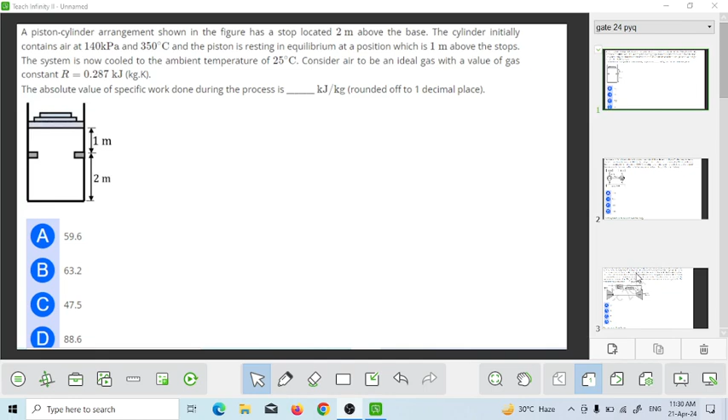In the previous class, we discussed GATE 2024 1 mark questions. A few questions were solved, and in this class, we solve the rest of the questions from GATE 2024. So, the first question is a piston cylinder arrangement.

The piston cylinder arrangement shown in the figure has a stop located 2 meter above the base. This is the base. Here, the stop is located 2 meter above the base, and the cylinder initially contains air at 140 kilopascal pressure and 350 degree centigrade temperature. The piston is resting in equilibrium at a position which is 1 meter above the stop. This is where the piston initially rests, and the system is now cooled to ambient temperature 25 degree centigrade.

Consider air to be an ideal gas. This is the process. Consider air to be an ideal gas with value of gas constant R equal to 0.287 kilojoule per kg Kelvin, and the absolute value of specific work done during the process in kilojoule per kg is equal to how much? Kilojoule per kg, that means we have to treat mass equal to 1 kg. So the given data will be: this is position 1, this is position 2, and this is position 3.

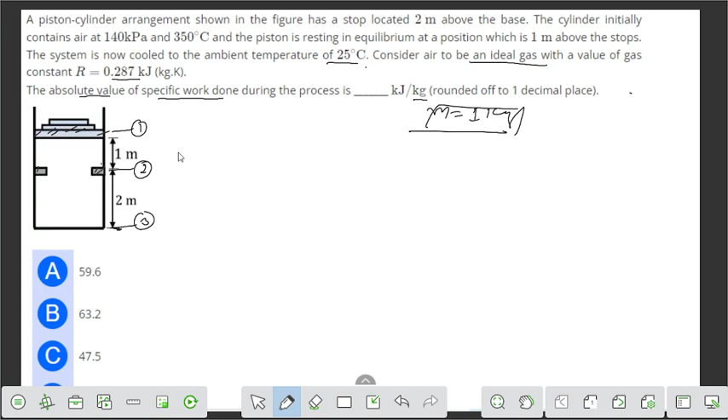As from position 2 to 3 the volume does not change, and this is a closed system, work done from 2 to 3 will be P(V2 minus V3). As the position does not change, V2 and V3 are constant, that means work done from 2 to 3 equals 0. So we have to calculate the work done from 1 to 2. Work done in process 1 to 2 will be P(V1 minus V2),

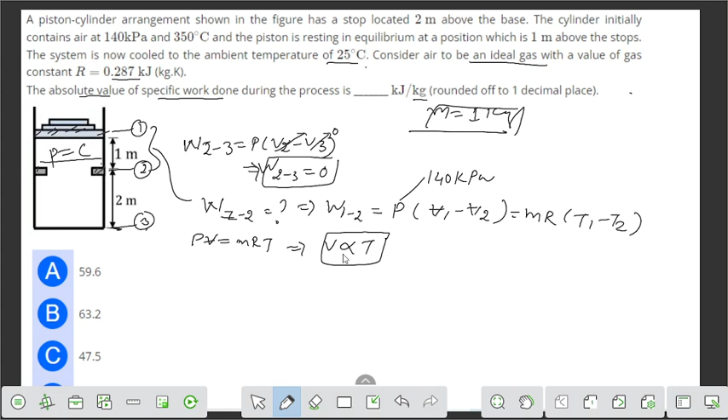where from 1 to 2 pressure is constant. The given pressure is 140 kilopascal, and V1, V2 we have to calculate from the ideal gas equation, PV equals mRT. As pressure is constant, volume is directly proportional to temperature, so you can write it as W equals mR(T1 minus T2). The temperature T1 given is 350 centigrade, converting it, 350 plus 273 equals 623 Kelvin. T2 we have to know, mass is 1 kg, and R given is 0.287 kilojoule per kg Kelvin, but T2 we have to calculate.

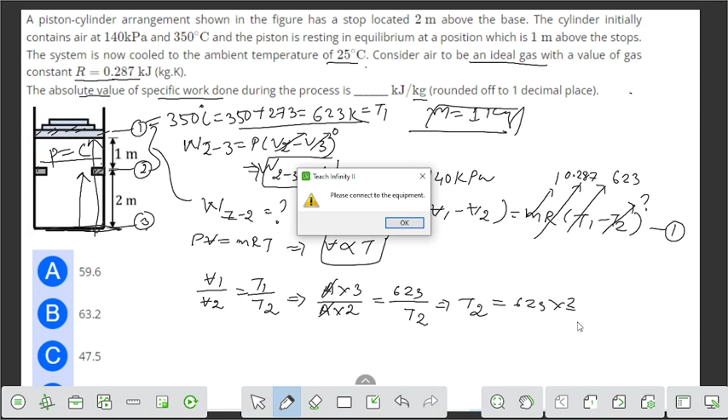This is equation 1. As you know, V1 by V2 is equal to T1 by T2. V1 is equal to area into this length, that means 3 meter, and V2 is equal to area into this length, 2 meter, which is equal to T1, given 623 Kelvin, over T2 which we have to find. So T2 is equal to 623 into 2 by 3, T2 equals 415.3 Kelvin.

By putting the value of T2 in equation 1, we get W for process 1 to 2 equal to 1 into 0.287 into (623 minus 415.3), and we get 59.6 kilojoule per kg. So option A will be the correct answer.

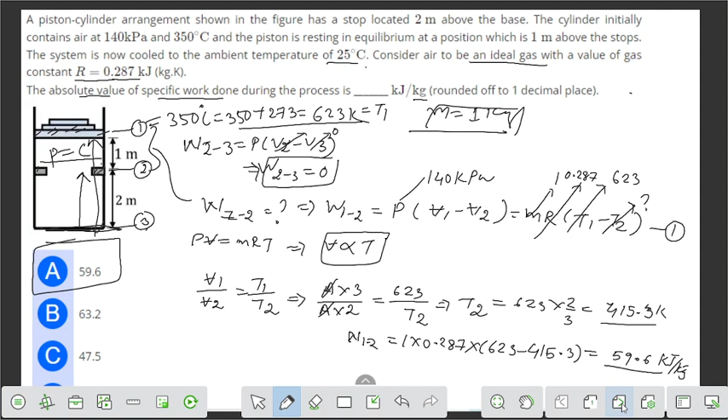Then the next question is: a heat pump is driven by the work output of a heat engine, as shown in the figure. The heat engine extracts 150 kilojoule of heat from a source at 1000 Kelvin. The heat pump absorbs heat from ambient at 280 Kelvin and delivers heat to the room, which is maintained at 300 Kelvin. Consider the combined system to be ideal; what is the total amount of heat delivered to the room together by the heat engine and heat pump in kilojoule?

So this is the heat engine diagram and this is the heat pump diagram, and the process has to be assumed ideal. That means it follows the maximum Carnot efficiency. The efficiency of a heat engine is 1 minus T lower by T higher. T lower means sink temperature and T higher means source temperature. That means 1 minus 300 Kelvin over 1000 Kelvin, the zeros cancel, 1 minus 3 by 10, that means 7 by 10 efficiency, which is equal to W net by Q in for the heat engine.

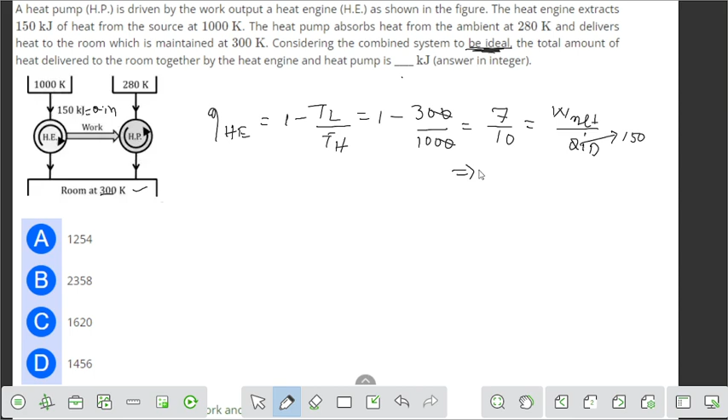This is Q in, and Q in is given as 150 kilojoule. So W net equals 7 by 10 into 150. Zeros cancel, 15 into 7, equal to 105 kilojoule. This work is given to the heat pump directly; let this be Q1 and this be Q2. From the heat pump, applying the first law, Q1 plus W net is equal to Q2, where W net is 105 and Q1 and Q2 are not known.

So the heat pump COP, we know, is TL divided by TL minus... this is also T1.

So this is also equal to heating effect. That means this is Q2, and work input, this is W net, and TL given. 300 divided by 300 minus T1 280 is equal to Q2 divided by W net, and W net we get from the equation as 105. By solving, 300 minus 280 is equal to 20, and 300 divided by 20 is equal to 15. 15 is equal to Q2 divided by 105.

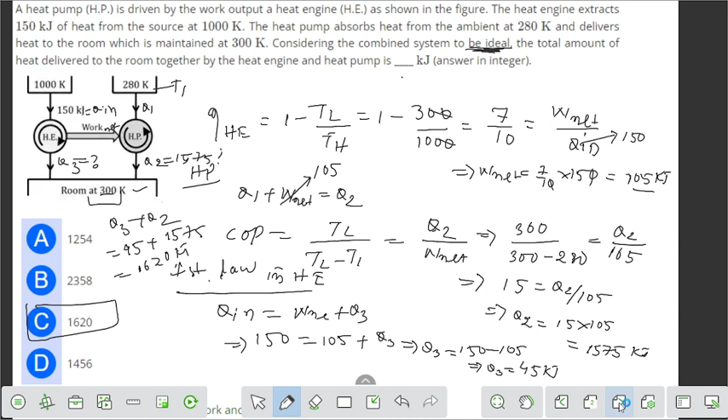So then next question, consider an air standard Brayton cycle with ideal compressor and turbine and regenerator as shown in the figure. Air enters into the compressor at 100 kilopascal and 300 Kelvin and exits the compressor at 600 kilopascal and 550 Kelvin. The exit of the combustion chamber is 1250 Kelvin and exits the adiabatic turbine at 100 kilopascal and 800 Kelvin.

The exhaust air from the turbine is used to preheat the air in regenerator. The exhaust air exits regenerator state 6 at 600 Kelvin. There is no pressure drop across the regenerator and combustion chamber. Also, there is no heat loss from the regenerator to the surrounding. The gamma value is 1.4, and we have to find thermal efficiency of the cycle in percentage. So let us draw the TS diagram.

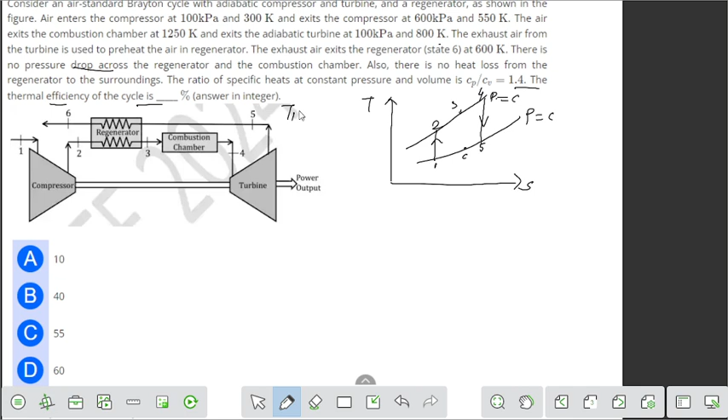This is constant pressure process. This is also constant pressure process. This is isentropic compression, and this is expansion. This is process 1 and 2, 4, 5 and 6. This is 3. Given data, T1 is 300 Kelvin as air enters the compressor. This is 1, T1, and exit of the compressor 600 kilopascal.

This pressure is constant, 600 kilopascal, and this is also 100 kilopascal as constant pressure. So at T2, the exit pressure of compressor is 600 kilopascal and 550 Kelvin. The temperature is 550 Kelvin, and the exit of combustion chamber, that means point 4, T4 is 1250 Kelvin, and the exit of adiabatic turbine, this is the turbine where work will be produced, and work is given to the compressor WC, and exit of the adiabatic turbine is 100 kilopascal and 800 Kelvin.

So T5 is 800 Kelvin. And given the exit of regenerator state 6, this is 600 Kelvin. So we know W net is equal to W turbine minus W compressor. So W turbine per kg, the specific work done, is equal to Cp T4 minus T5, minus compressor Cp T2 minus T1 at constant pressure, and Q reject is equal to Cp T6 minus T1.

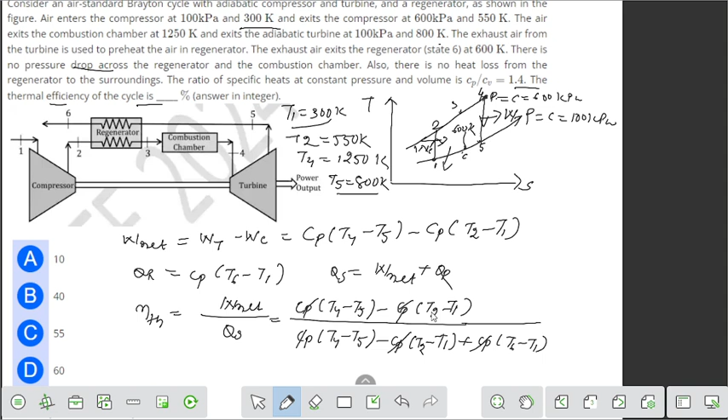So Cp cancels from both numerator and denominator, and by putting the values T4, T5, T2, T1 we get thermal efficiency equal to, where T4 value is 1250 minus T5 value 800, and T2 value 550 and T1 300, divided by T4 1250 minus T5 800, minus T2 550 and T1 300, plus T6 value 600 and T1 value 300.

By solving this, we get 1250 minus 800 is equal to 450, and 550 minus 300 is equal to 250, divided by 450 minus 250 plus 300. 450 minus 250 is equal to 200, divided by 200 plus 300 is equal to 500. This is equal to 2 by 5, in percentage into 100. This is 20, 2 into 20 is 40. That means thermal efficiency will be 40%.

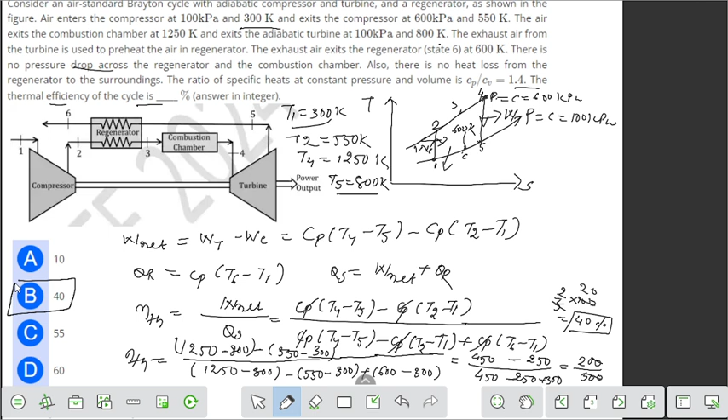Next question. A queuing system has one single server workstation that admits an infinitely long queue. The rate of arrival of jobs to the queuing system follows the Poisson distribution with mean 5 jobs per hour. That means lambda, the arrival rate, is 5, and the service time of the server is exponentially distributed with mean 6 minutes. So 6 minutes means mu, the service rate, is equal to 60 divided by 6, which is 10 jobs per hour. This is the lambda, and this is the mu.

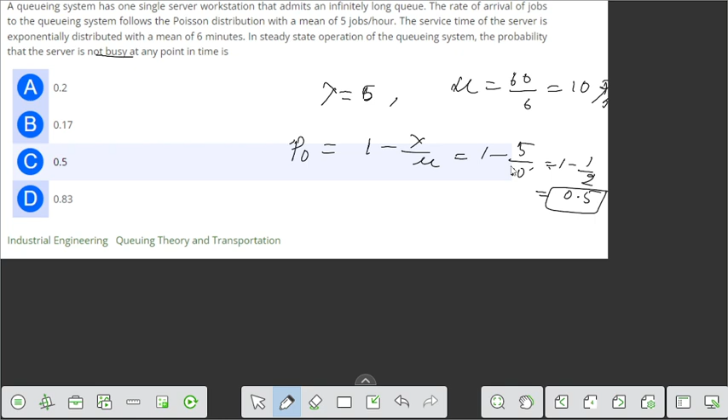Mu is 10. So in steady state operation of the queue system, the probability that the server is not busy. So this is the idle time. That means not busy, no one in the system. So P naught is equal to 1 minus lambda by mu. Lambda is 5 and mu is 10. 1 minus 1 by 2 is equal to 0.5. So the probability of not busy is equal to 0.5.

The next question: a set of jobs U, V, W, X, Y, Z arrive at time t equal to 0 at a production line consisting of two workstations, workstation 1 and workstation 2, in sequence, first followed by second, and the processing time in minutes of the jobs is given below. This is the time 5476 3648 6587, and we have to find the sequence in which jobs must be processed in the production line if the total time is to be minimized.

So for workstation 1 and workstation 2, we have to make a table. There are six different jobs, so we make a table of 6 boxes: 1, 2, 3, 4, 5 and 6. The minimum time taken by workstation 1 will be placed on the left, and the minimum time taken by workstation 2 will be placed on the right side. So first find out the minimum time. This is 3, taken by W on workstation 1. So as I said, minimum time on workstation 1 goes to the left side, so W will be on the left.

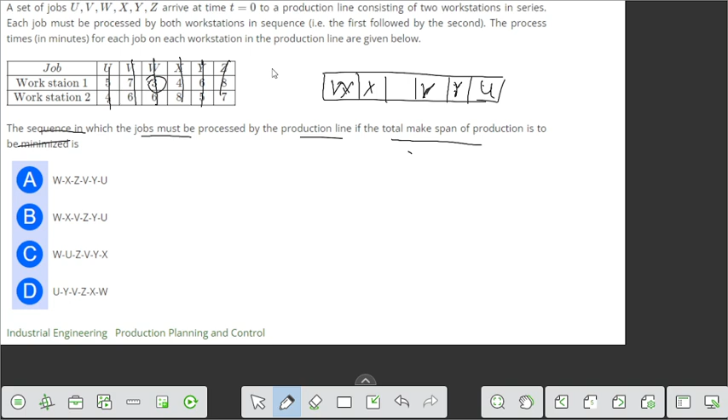Next minimum time is 4, on workstation 1, so taken on the left side; this is X. Next minimum time is 4, on workstation 2, placed on the right side; this is U. Next minimum time is 5 on workstation 2, placed on the right side. Next minimum time is 6 on workstation 2, placed on the right side. Next is Z, which fills the one blank box, so W X Z V Y U will be the sequence. The first one is the right answer.

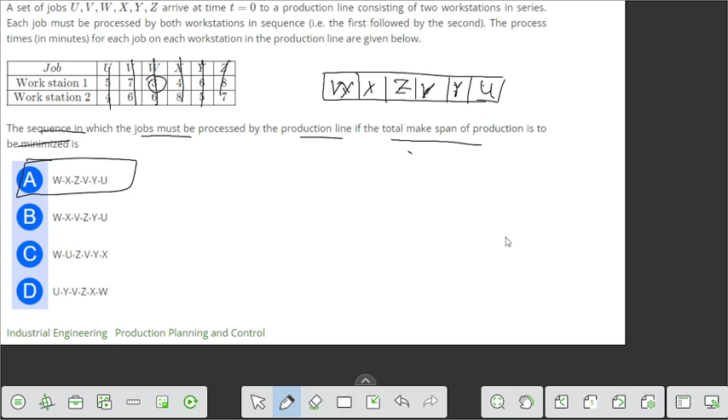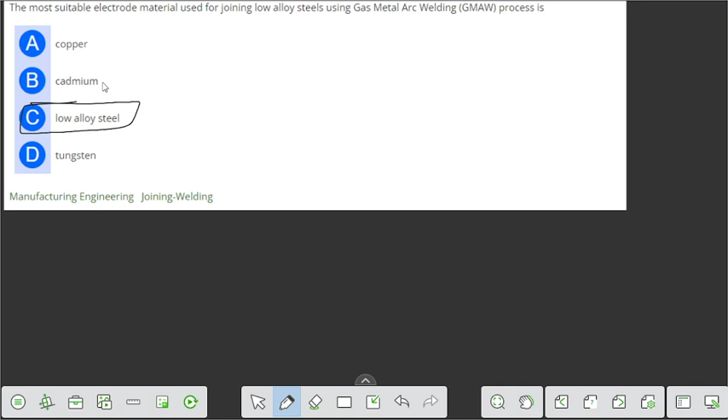Next, the preparatory functions in CNC machine programming are denoted by which alphabet. The preparatory function will be G code, so option A is correct. Next, the most suitable electrode material for joining low alloy steel in the gas metal arc welding process will be low alloy steel, so the answer is C. Next, the allowance provided to the pattern for easy withdrawal from the sand mold. The options are finishing allowance, shrinkage allowance, distortion allowance, shake allowance. The answer is shake allowance, provided for easy withdrawal of the pattern from the sand mold.

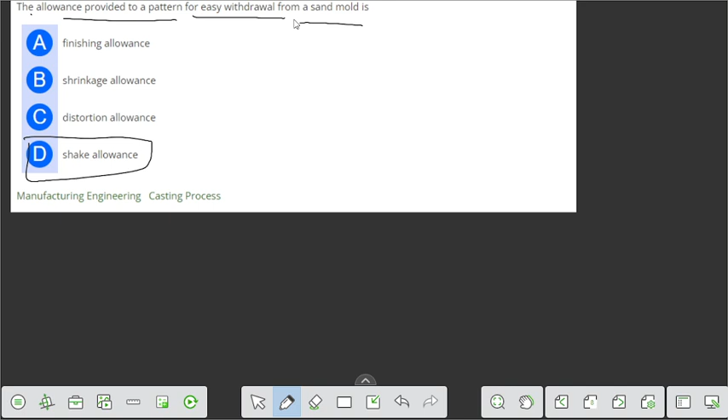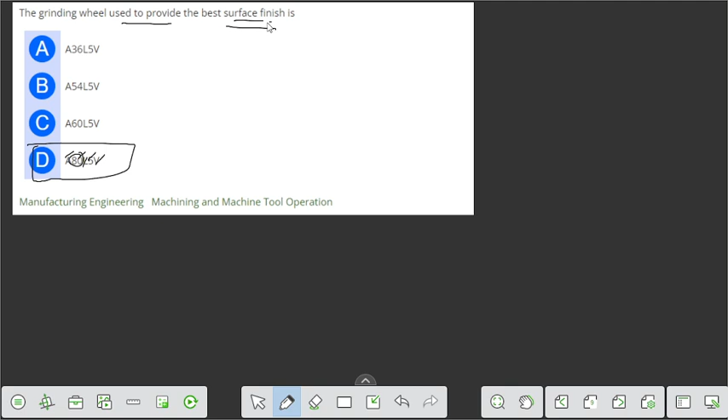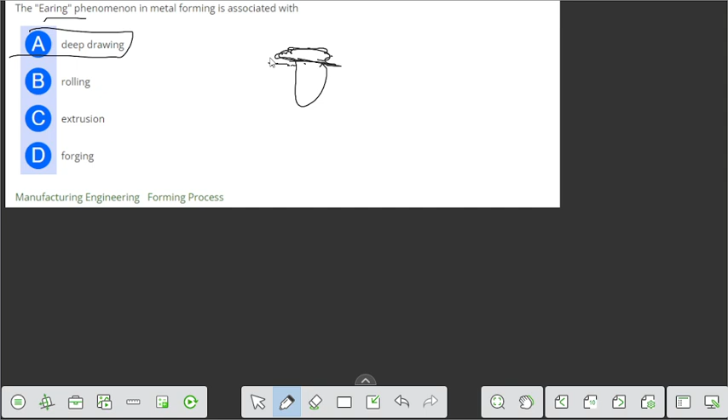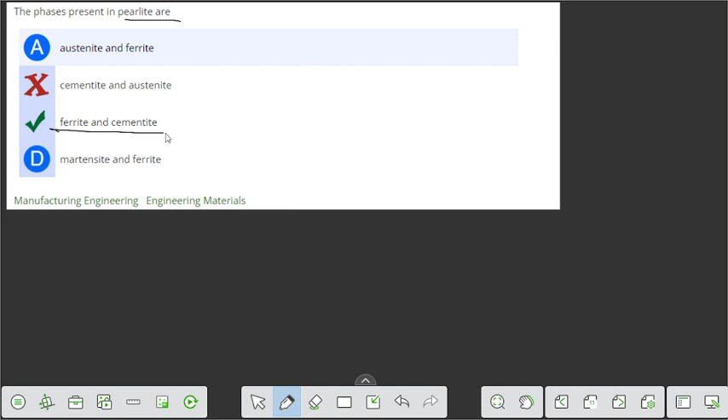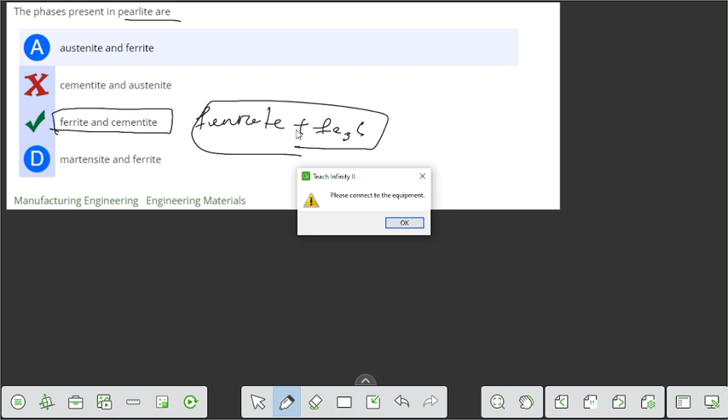Next, the earing phenomenon in metal forming is associated with deep drawing, where the die and punch act, and this phenomenon is called earing. This is found in deep drawing. Next, the phases present in pearlite. Pearlite contains ferrite and cementite; this is pearlite. So that's all for today, and these are all the 1 mark questions from GATE 2024.